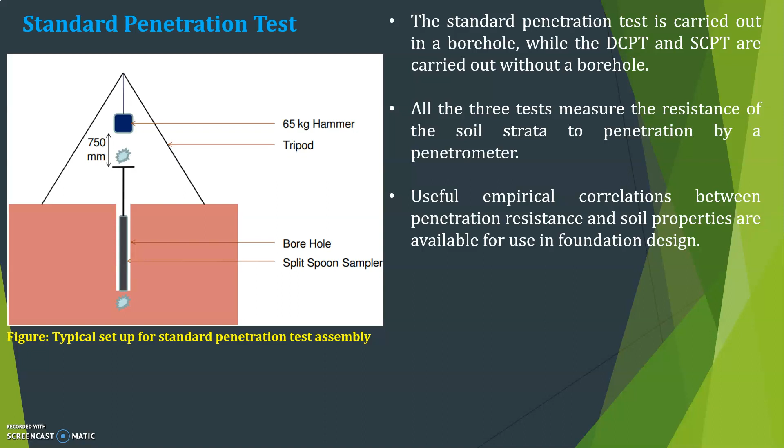The standard penetration test is carried out in a borehole, while DCPT (dynamic cone penetration test) and SCPT (static cone penetration test) are carried out without a borehole. There are three penetration tests: SPT, DCPT, and SCPT. All three measure the resistance of the soil strata to penetration by a penetrometer, and useful empirical correlations between penetration resistance and soil properties are available for use in foundation design.

This is the most extensively used penetrometer test and employs a split spoon sampler, which consists of a driving shoe, a split barrel of circular cross-section longitudinally split into two parts, and a coupling. IS 2131-1981 gives the standard for carrying out the test; you can refer to it for a detailed and clear picture of this penetration test.

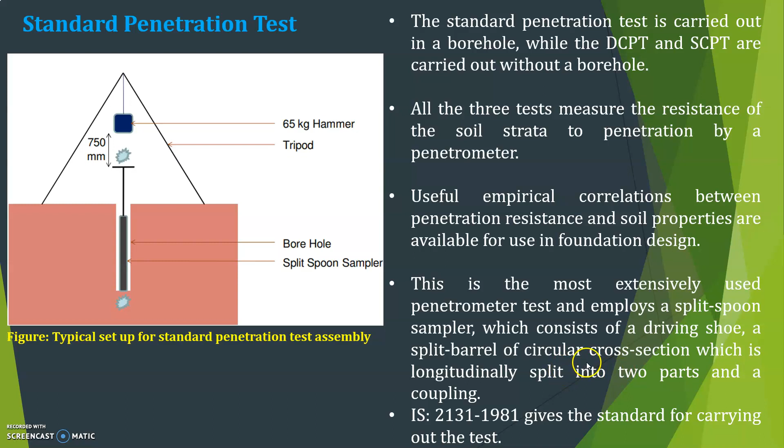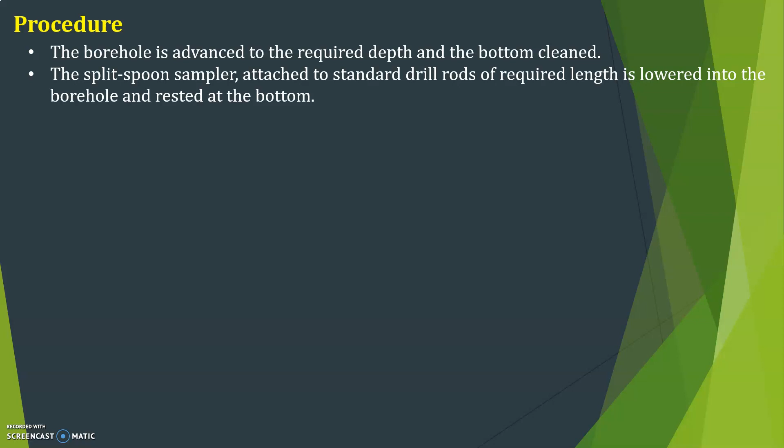The procedure: the borehole is advanced to the required depth and the bottom cleaned. The split spoon sampler, attached to standard drill rods of required length, is lowered into the borehole and rested at the bottom. It is then driven into the soil for a distance of 450 mm by blows of a drop hammer of 65 kg falling vertically and freely from a height of 750 mm.

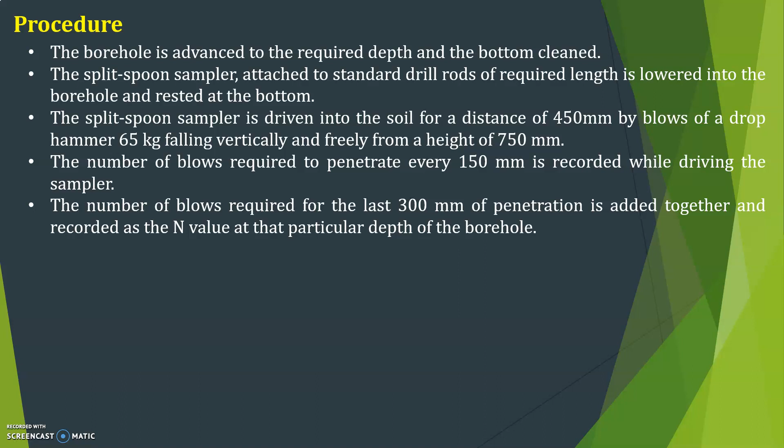The number of blows required to penetrate every 150 mm is recorded while driving the sampler. The number of blows required for the last 300 mm of penetration is added together and recorded as the N value at that particular depth of the borehole. The number of blows required to effect the first 150 mm of penetration, called the seating drive, is disregarded.

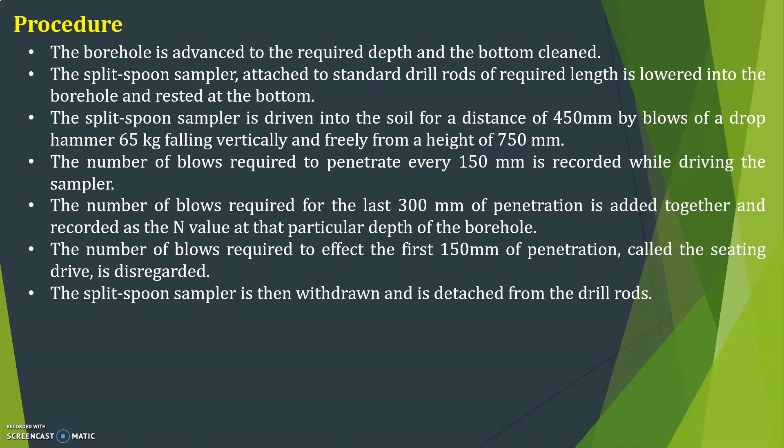The split spoon sampler is then withdrawn and detached from the drill rods. The split barrel is disconnected from the cutting shoe and the coupling. The soil sample collected inside the split barrel is carefully collected so as to preserve the natural moisture content and transported to the laboratory for tests.

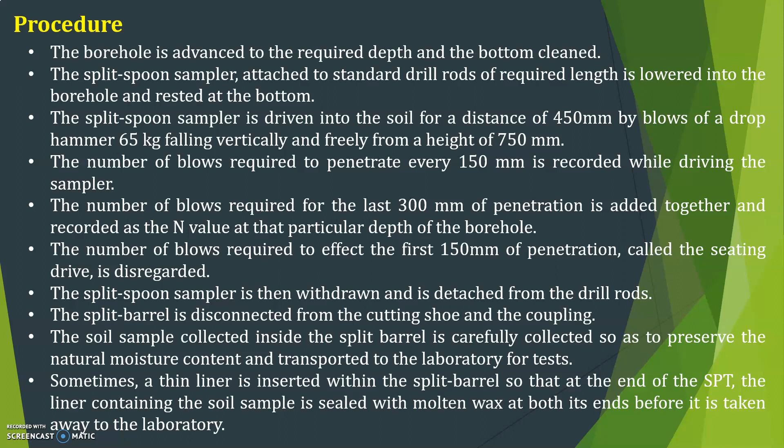Sometimes a thin liner is inserted within the split barrel so that at the end of the SPT, the liner containing the soil sample is sealed with molten wax at both its ends before it is taken away to the laboratory.

This is a setup on the field. The SPT is carried out at every 0.75 meter vertical interval in a borehole. This can be increased to 1.5 meters if the depth of the borehole is large.

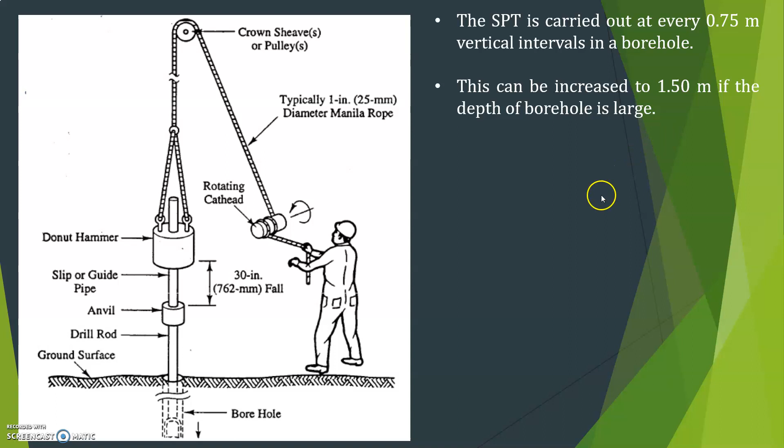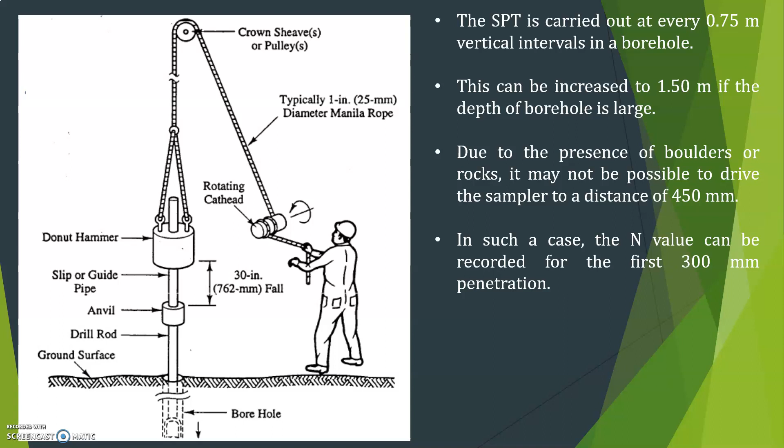Due to the presence of boulders or rocks, it may not be possible to drive the sampler to a distance of 450 mm. In such a case, the N value can be recorded for the first 300 mm penetration. The boring log shows refusal and the test is halted if 50 blows are required for any 150 mm penetration, or 100 blows are required for 300 mm penetration, or 10 successive blows produce no advance.

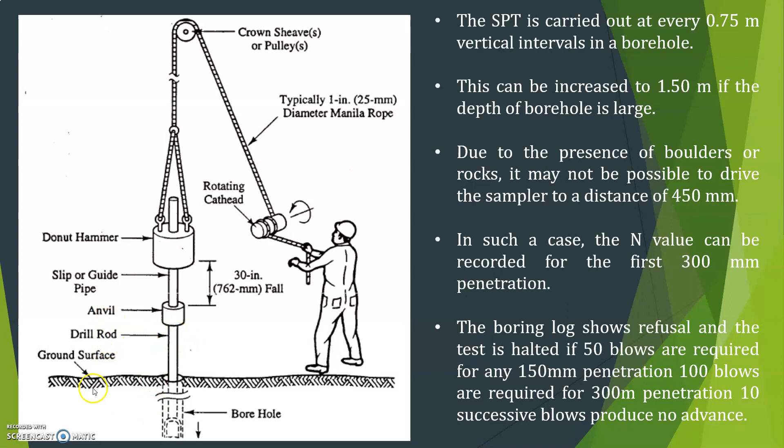You can see here the crown sheave or pulley, typically 1 inch or 25 mm diameter, and rotating cathead, and this is the hammer here, the slip or guide pipe, and the drill rod. This is the ground surface, and here it is the borehole.

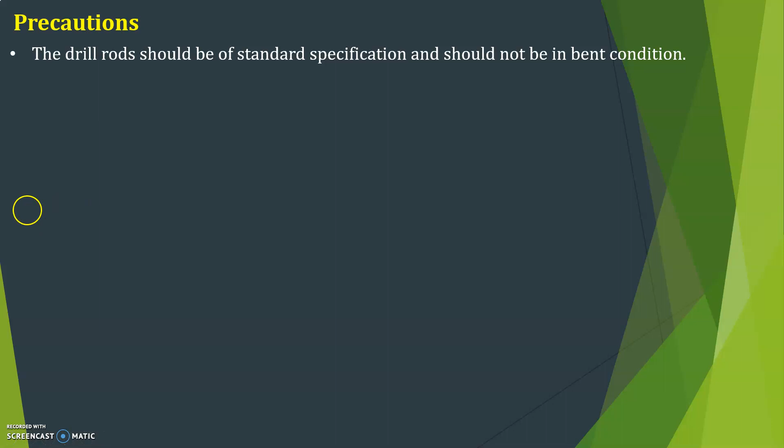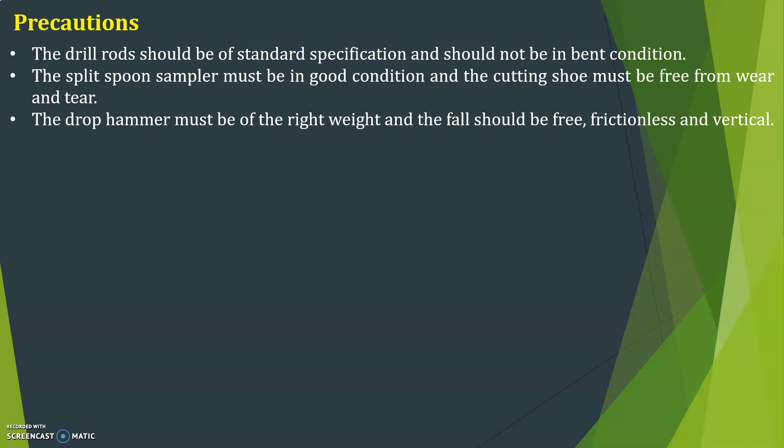Precautions: there are some precautions that have to be taken during this test. The drill rods should be of standard specification and should not be in bent condition. The split spoon sampler must be in good condition, and the cutting shoe must be free from wear and tear. The drop hammer must be of the right weight, and the fall should be free, frictionless, and vertical. The height of the fall must be exactly 750 mm; any change from this will seriously affect the N value.

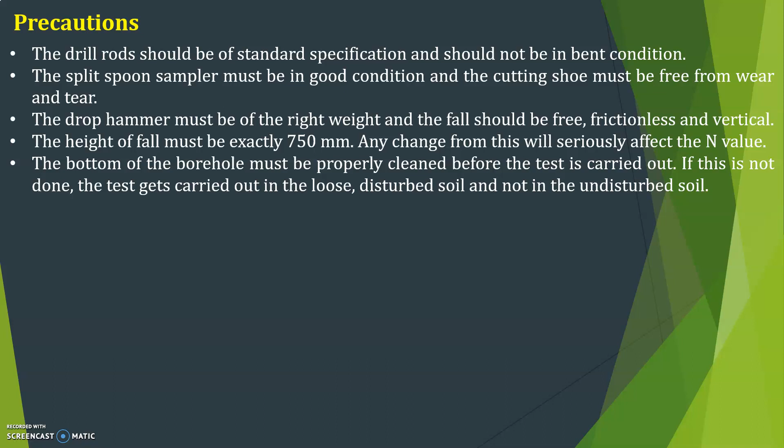The bottom of the borehole must be properly cleaned before the test is carried out. If this is not done, the test gets carried out in the loose, disturbed soil and not in the undisturbed soil. When a casing is used in the borehole, it should be ensured that the casing is driven just short of the level at which the SPT is to be carried out.

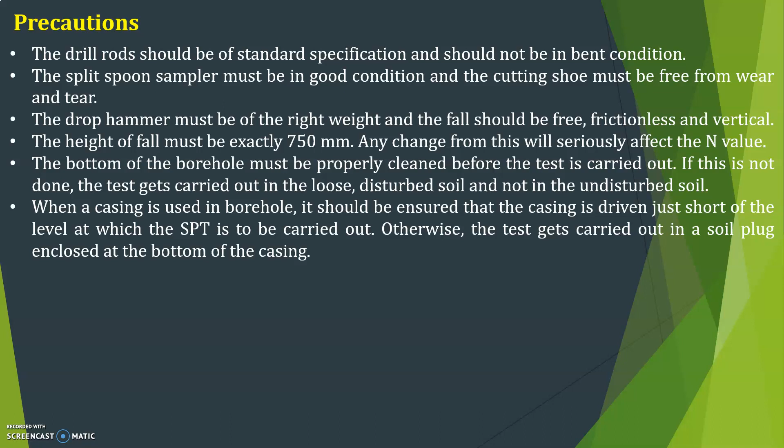Otherwise, the test gets carried out in a soil plug enclosed at the bottom of the casing. When the test is carried out in a sandy soil below the water table, it must be ensured that the water level in the borehole is always maintained slightly above the groundwater level. If the water level in the borehole is lower than the groundwater level, a quick condition may develop in the soil and very low N values may be recorded.

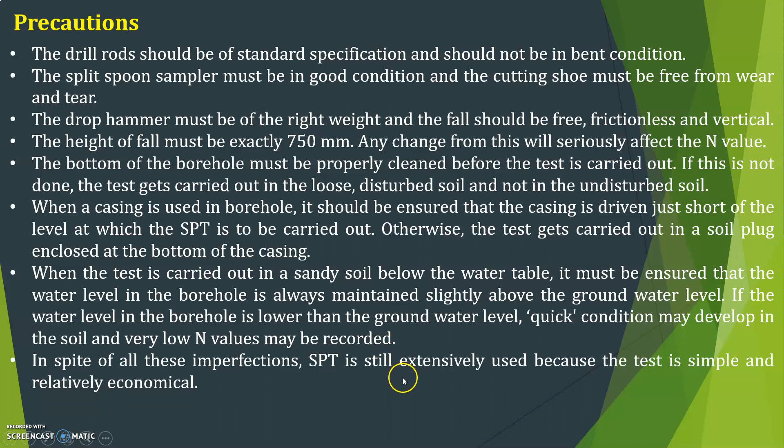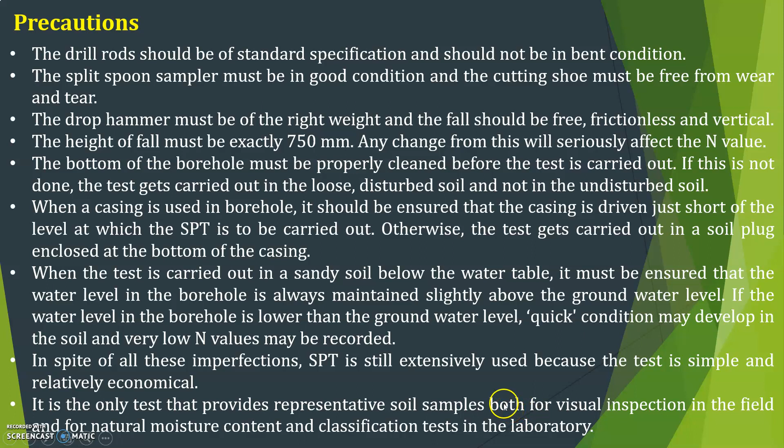In spite of all these imperfections, SPT is still extensively used because the test is simple and relatively economical. It is the only test that provides representative soil samples both for visual inspection in the field and for natural moisture content and classification tests in the laboratory.

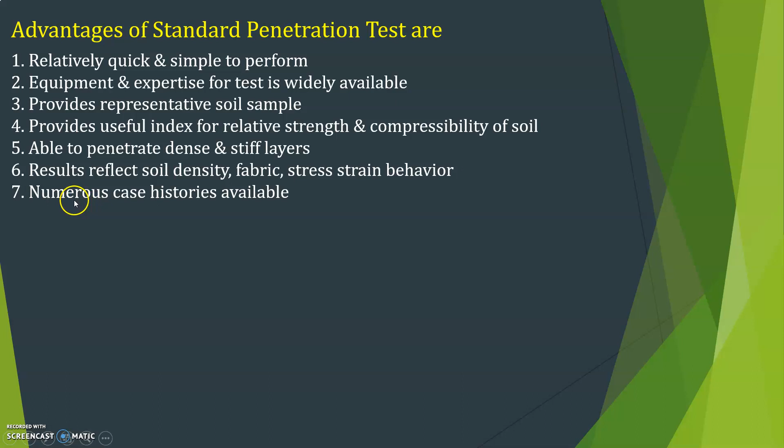Numerous case histories are available. Disadvantages of standard penetration tests: requires the preparation of a borehole, dynamic effort is related to mostly static performance, SPT is abused, standards regarding energy are not uniform, and if hard stone is encountered it is difficult to obtain reliable results. The test procedure is tedious and requires heavy equipment, and it is not possible to obtain properties continuously with depth.

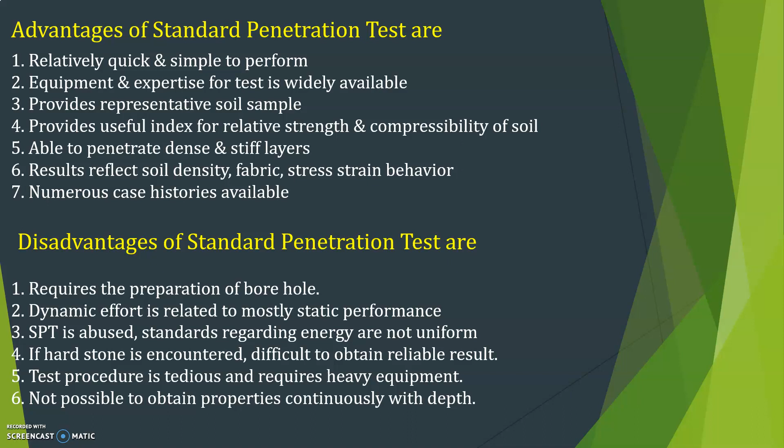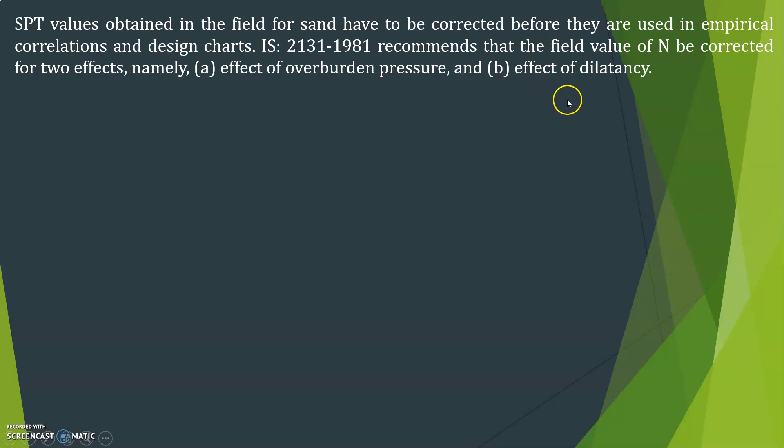SPT values obtained in the field for sand have to be corrected before they are used in empirical correlations and design charts. As per IS 2131/1981, it recommends that the field value of N be corrected for two effects, namely the first is the effect of overburden pressure and the second is the effect of dilatancy.

The first one we will see is correction for overburden pressure. Several investigators have found that the penetration resistance, or the N value, in a granular soil is influenced by the overburden pressure. Of two granular soils possessing the same relative density but having different confining pressures, the one with a higher confining pressure gives a higher N value. Since the confining pressure, which is directly proportional to the overburden pressure, increases with depth, the N values at shallow depths are underestimated and the N values at larger depths are overestimated.

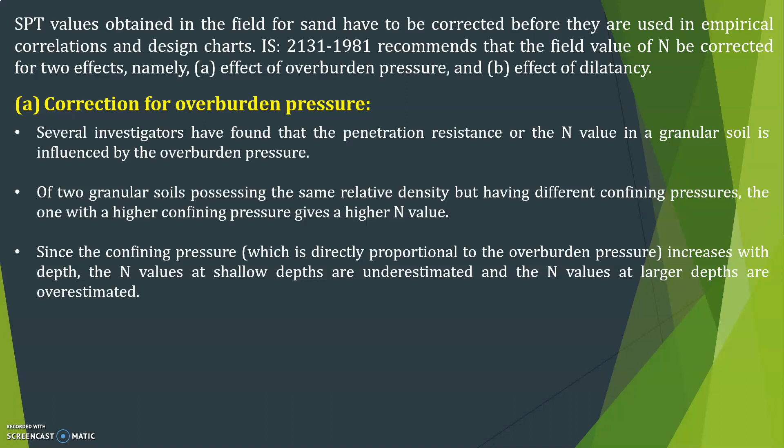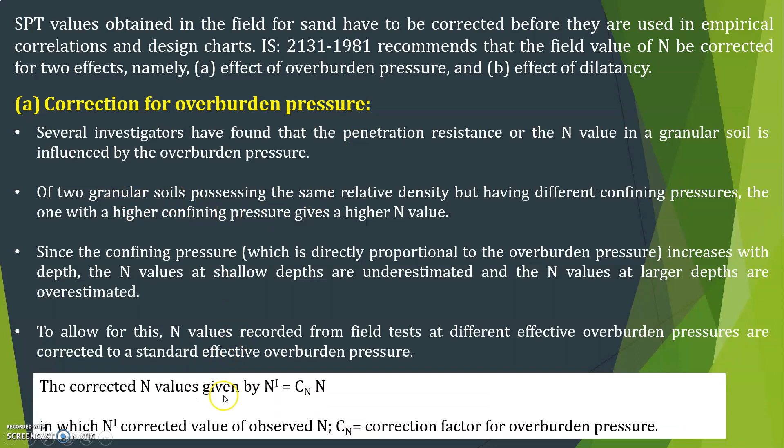To allow for this, N values recorded from field tests at different effective overburden pressures are corrected to a standard effective overburden pressure. The corrected N value is given by N dash, which is equal to Cn into N, where N dash is the corrected value of the observed N, and Cn is the correction factor for overburden pressure.

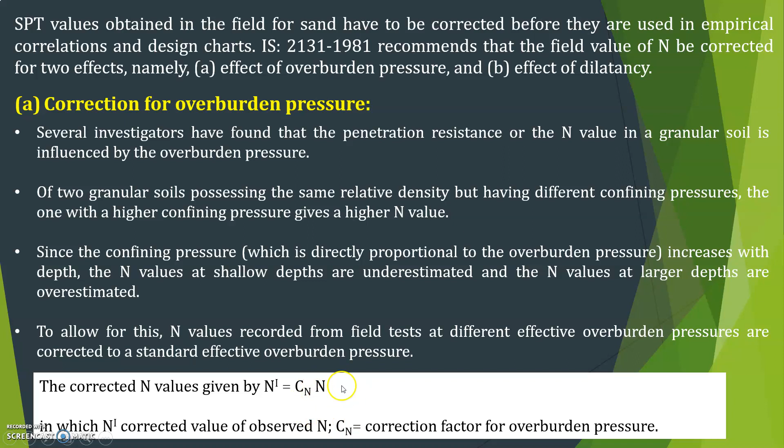So this is about the correction factor for overburden pressure. Whatever value you get in the field, that N value has to be corrected, as given by this equation: N dash is equal to Cn into N, where Cn is the correction factor for overburden pressure. That is a constant value, different for different types of soils, and N is the obtained field value. So you get the corrected value of N.

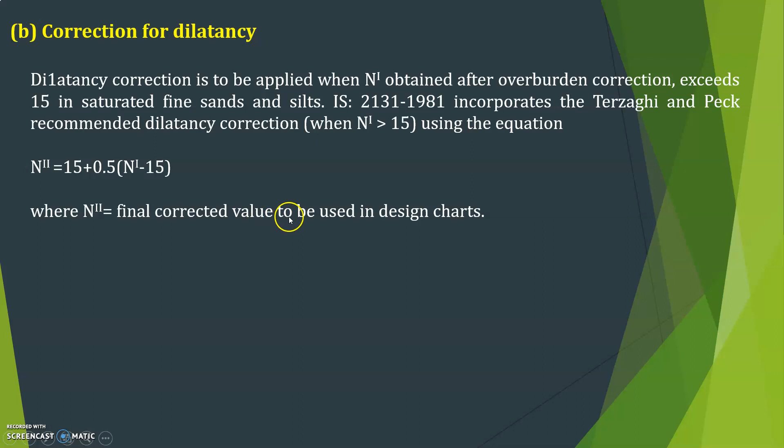The second correction is for dilatancy. Dilatancy correction is to be applied when N dash, obtained after overburden correction, exceeds 15 in saturated fine sands and silts. IS 2131-1981 incorporates the Terzaghi and Peck recommended dilatancy correction when N dash is greater than 15, using the equation N double dash equals 15 plus 0.5 times (N dash minus 15), where N double dash is the final corrected value to be used in the design charts.

If N dash is less than or equal to 15, N double dash is equal to N dash. But if N dash is greater than 15, this indicates a dense sand. In such soil, the fast rate of application of shear through the blows of a drop hammer is likely to induce negative pore water pressure in a saturated fine sand under undrained loading conditions. Consequently, a transient increase in shear resistance will occur, leading to an SPT value higher than the actual one.

So this is about corrections for dilatancy. SPT is one of the very important tests commonly used, and the split spoon sampler is used for this test, with mainly two types of corrections: correction for overburden and correction for dilatancy. You can refer to the IS code, which gives a clear picture and detailed procedure of this test. I hope all of you understood. Thank you.